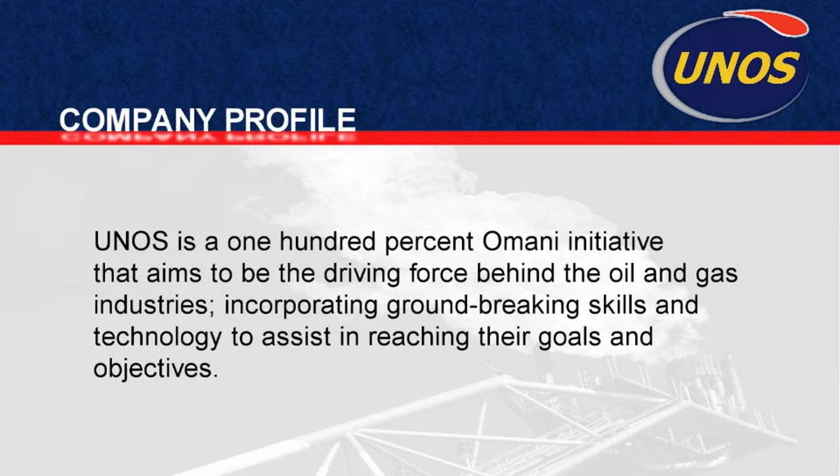UNOS is a 100% Omani initiative that aims to be the driving force behind the oil and gas industries, incorporating groundbreaking skills and technology to assist in reaching their goals and objectives. UNOS incorporates the expertise of foreign management support and experienced technical in-house knowledge to respond and provide the customer with enhanced solutions. Our core business activity is built around the emerging sector of Oman's oil and gas industry.

UNOS's intention is to add further services responding to niche market opportunities. Our vision at UNOS is to become the leading service provider to the oil and gas industry and the preferred employer in the Sultanate of Oman.

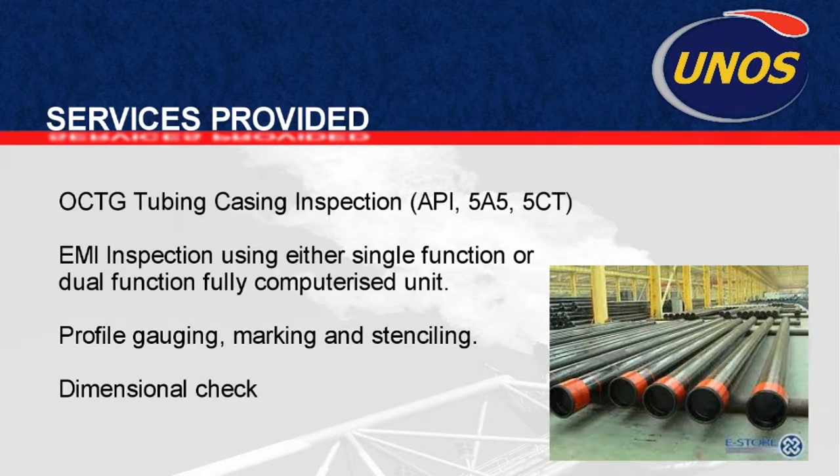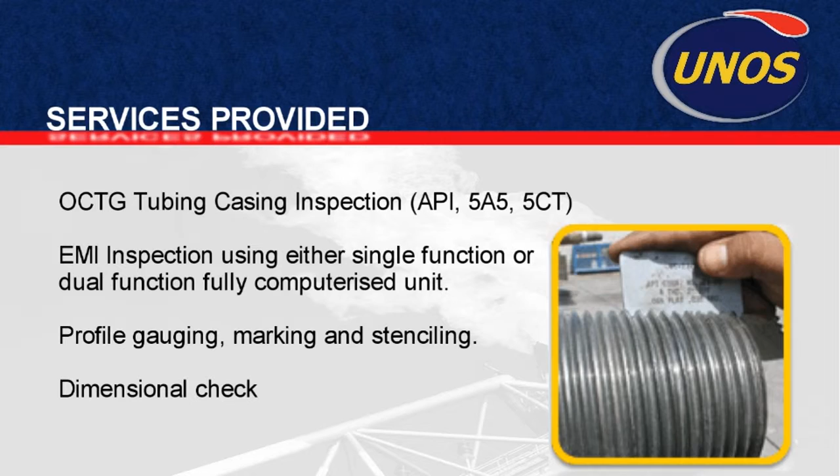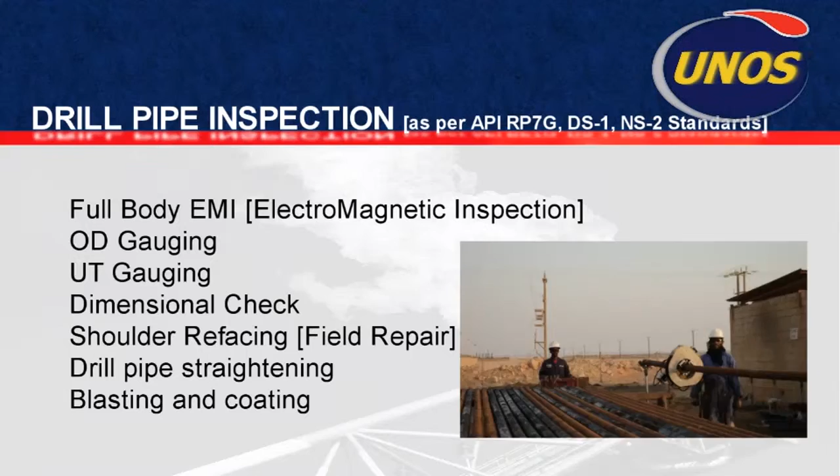OCTG tubing and casing inspection as per API 5A5 5CT. EMI inspection using either single function or dual function fully computerized unit. Profile gauging, marking and stenciling. Dimensional check. Drill pipe inspection. Full body EMI, OD gauging, UT gauging, dimensional check, shoulder refacing, field repair. Drill pipe straightening, blasting and coating.

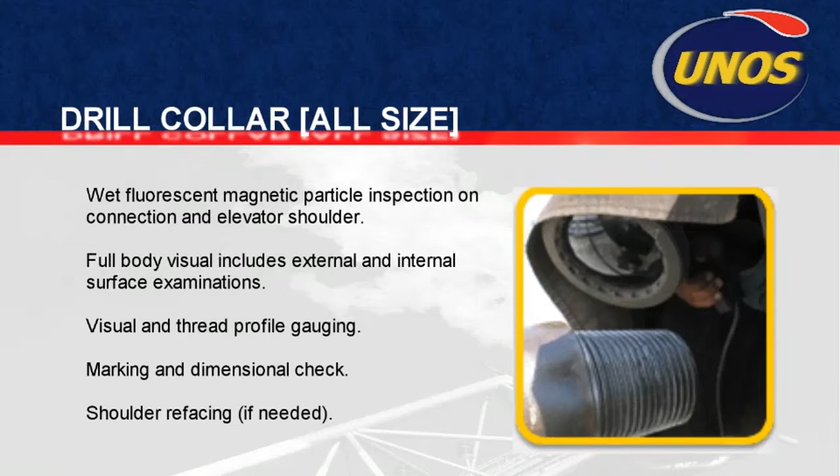Drill collar inspection all sizes. Wet fluorescent magnetic particle inspection on connection and elevator shoulder. Full body visual includes external and internal surface examinations. Visual and thread profile gauging. Marking and dimensional check. Shoulder refacing if needed.

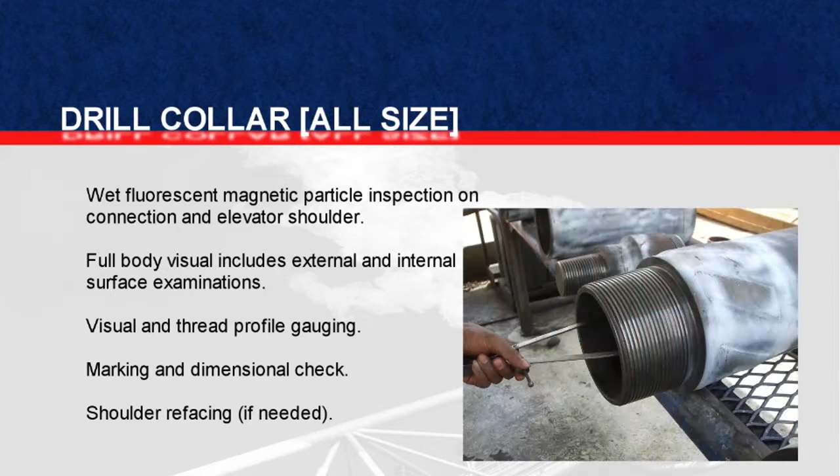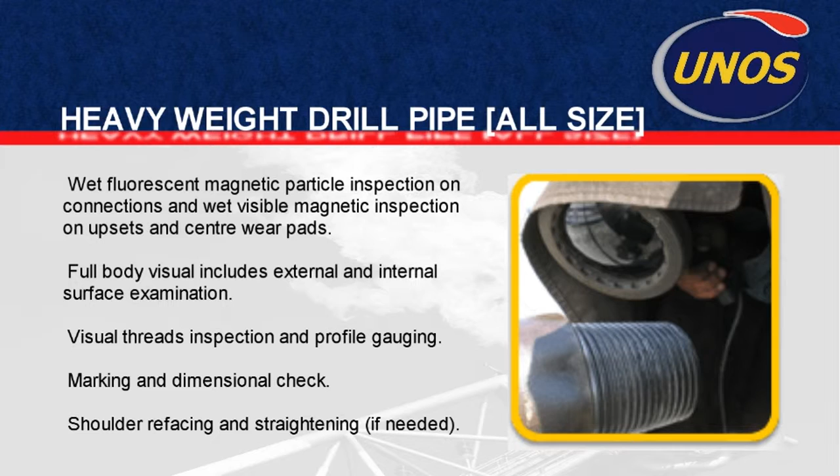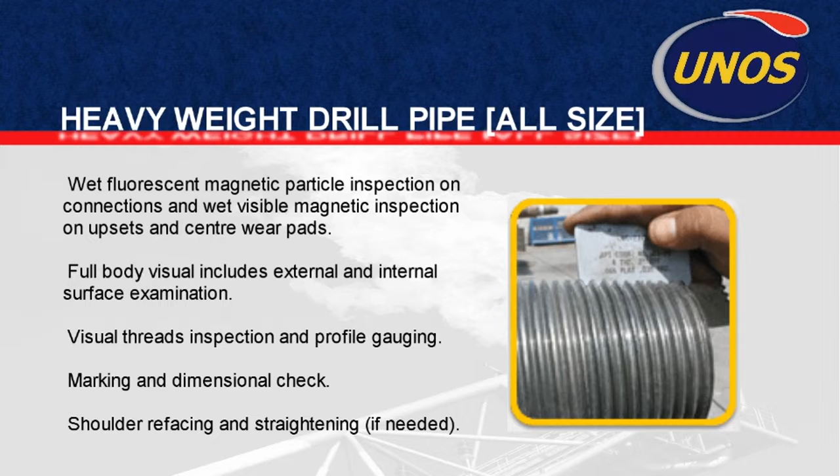Heavyweight drill pipe all sizes. Wet fluorescent magnetic particle inspection on connections and wet visible magnetic inspection on upsets and center wear pads. Full body visual includes external and internal surface examination. Visual threads inspection and profile gauging. Marking and dimensional check. Shoulder refacing and straightening if needed.

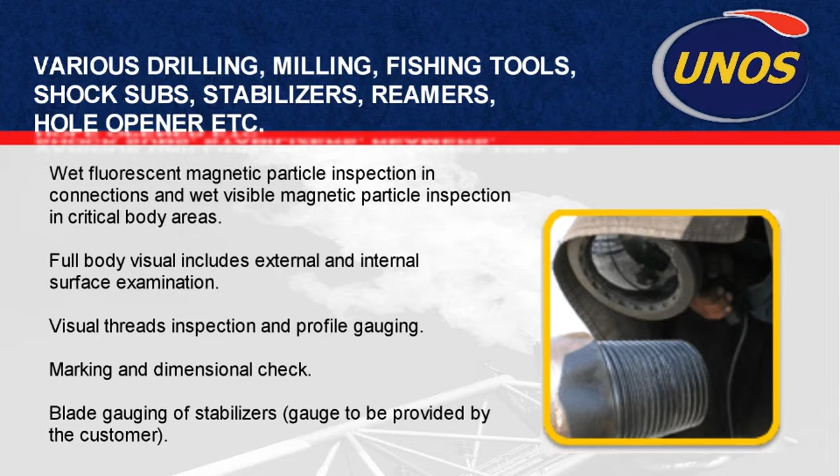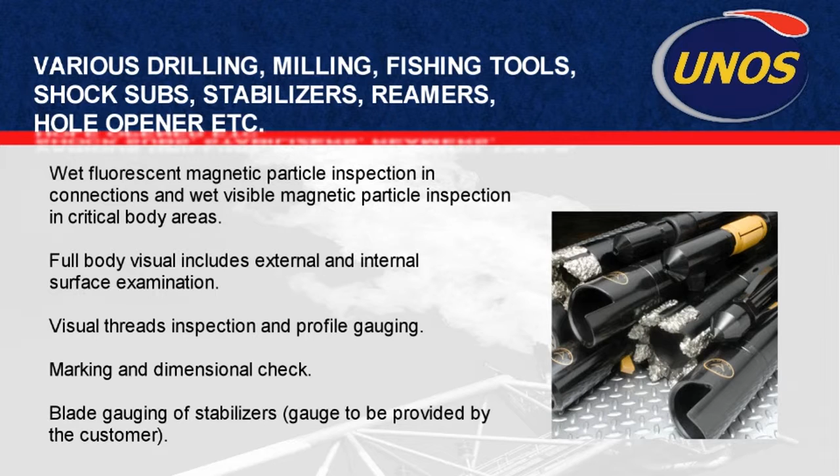Various drilling, milling, fishing tools, shock subs, stabilizers, reamers, hole openers, etc. Wet fluorescent magnetic particle inspection in connections and wet visible magnetic particle inspection in critical body areas. Full body visual includes external and internal surface examination. Visual threads inspection and profile gauging. Marking and dimensional check. Blade gauging of stabilizers.

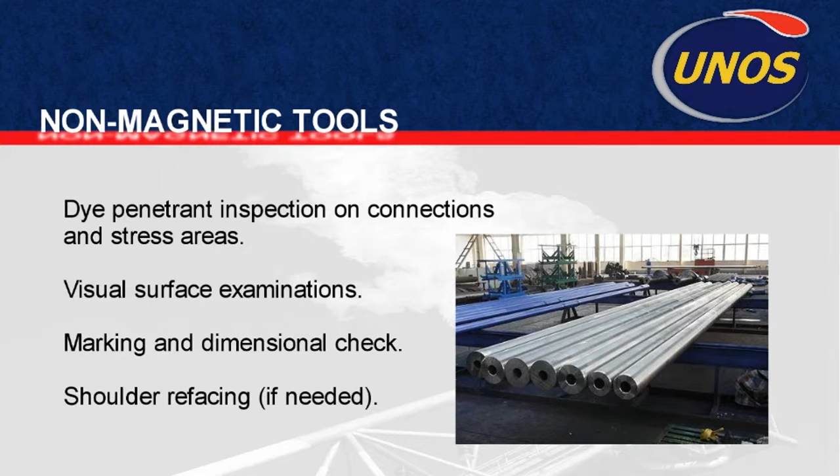Non-magnetic tools. Dye penetrant inspection on connections and stress areas. Visual surface examinations. Marking and dimensional check. Shoulder refacing if needed.

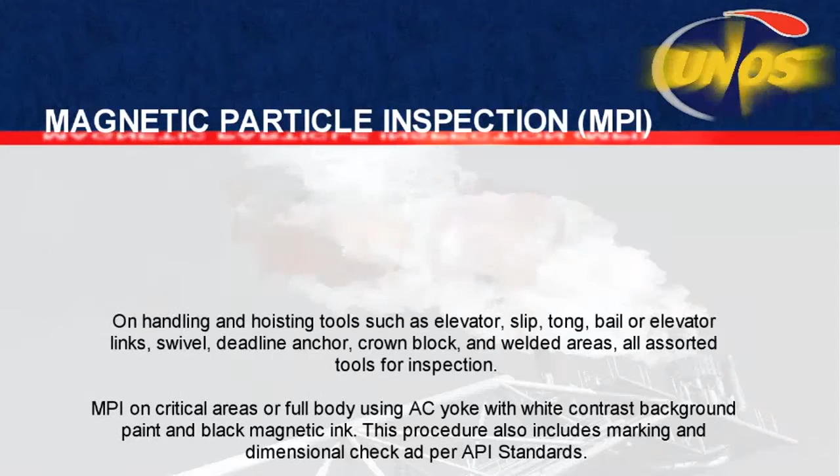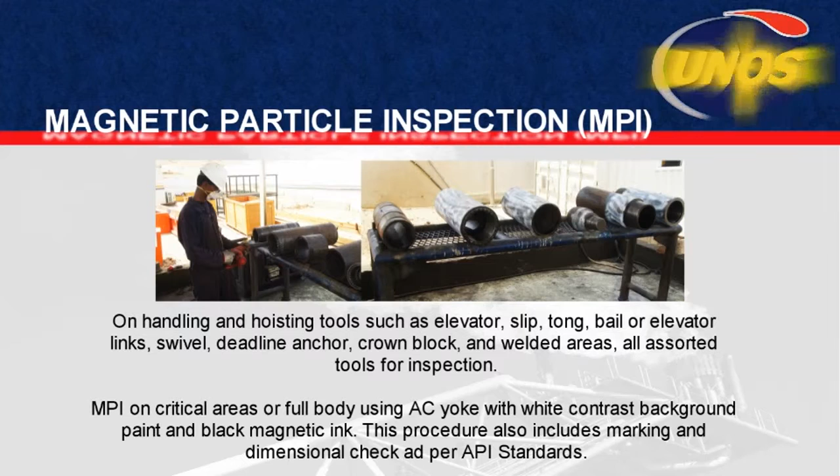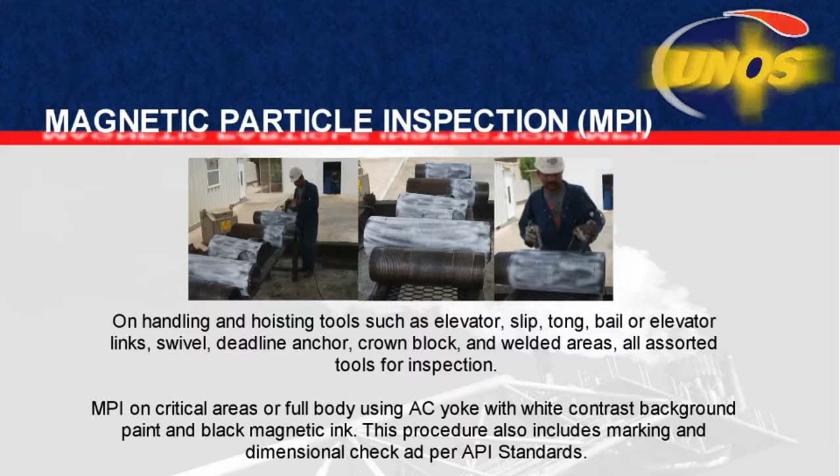Magnetic particle inspection on handling and hoisting tools such as elevator, slip, tong, bail or elevator links, swivel, deadline anchor, crown block, and welded areas, all assorted tools for inspection. MPI critical areas or full body using AC yoke with white contrast background paint and black magnetic ink. This procedure also includes marking and dimensional check as per API standards.

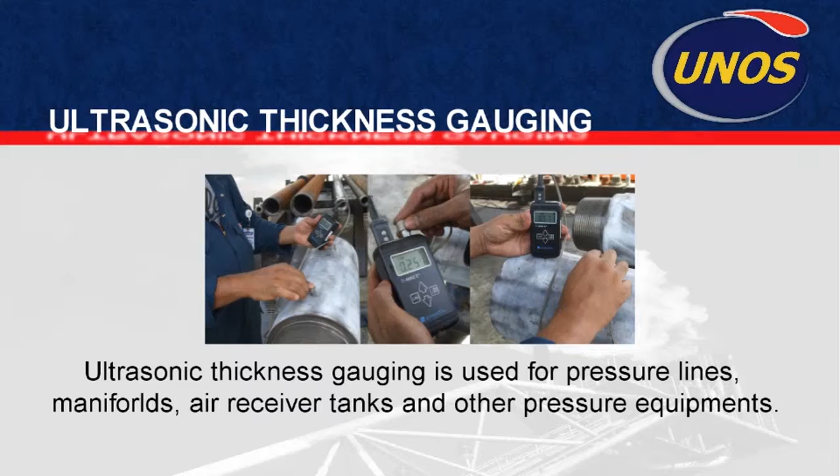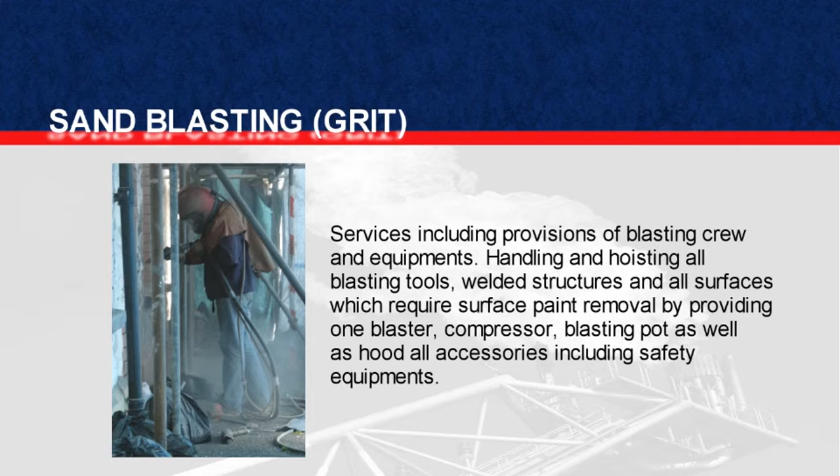Ultrasonic thickness gauging. Ultrasonic thickness gauging is used for pressure lines, manifolds, air receiver tanks, and other pressure equipment. Sandblasting grit. Services including provision of blasting crew and equipment, handling and hoisting all blasting tools, welded structures, and all surfaces which require surface paint removal by providing one blaster, compressor, blasting pot as well as hood, all accessories including safety equipment.

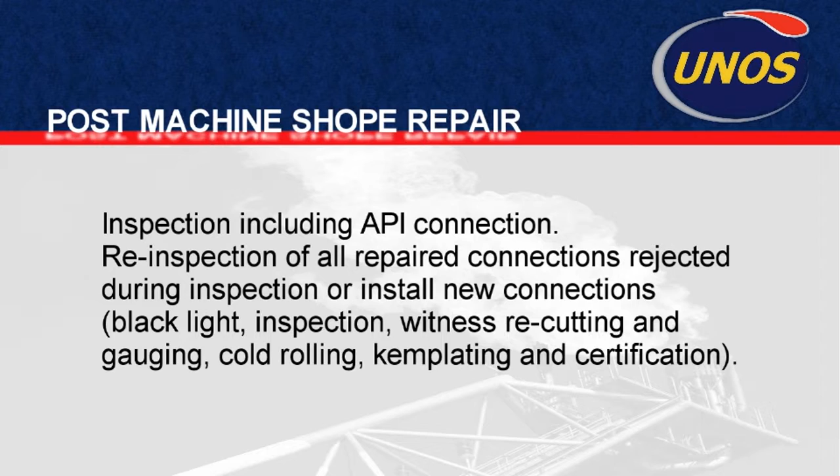Post-machine shop repair. Inspection including API connection, re-inspection of all repaired connections rejected during inspection, or install new connections, black light inspection, witness recutting and gauging, cold rolling, templating, and certification. Witness and certification. Witness and certification for all types of pressure testing.

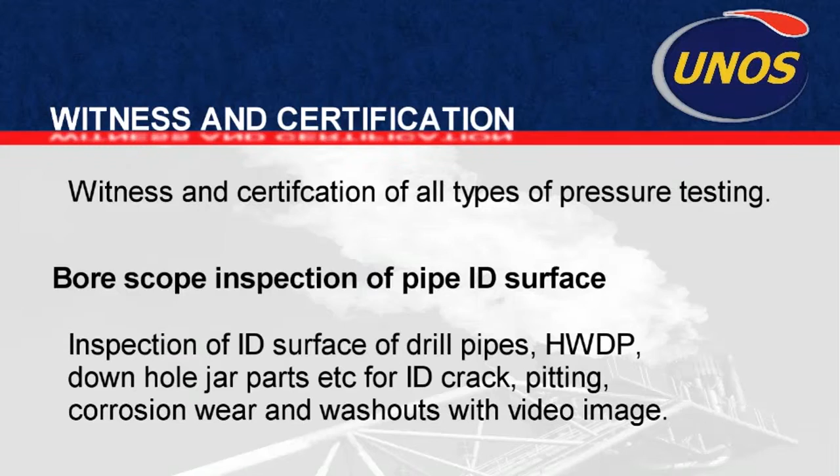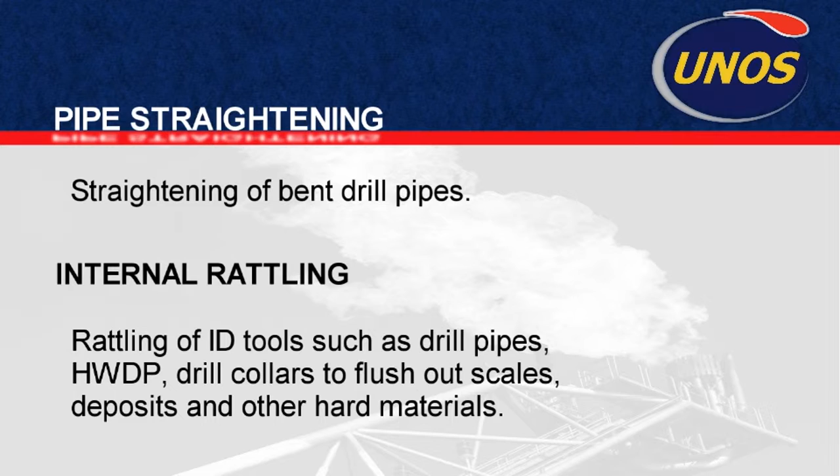Bore scope inspection of pipe ID surface. Inspection of ID surface of drill pipes, HWDP, downhole jar parts, etc. for ID crack, pitting, corrosion wear, and washouts with video image. Pipe straightening. Straightening of bent drill pipes. Internal rattling. Rattling of ID tools such as drill pipes, HWDP, drill collars to flush out scales, deposits, and other hard materials.

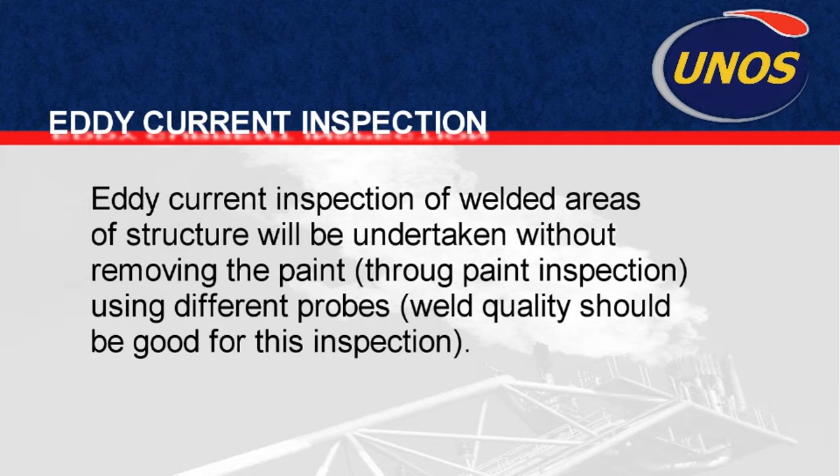Eddy current inspection. Eddy current inspection of welded areas of structure will be undertaken without removing the paint through paint inspection. Using different probes, weld quality should be good for this inspection.

Some of our clients are Petrogas, Weatherford, Baker Hughes INTEQ, Midwest Oilfield Services, Shaleem Petroleum, Shivani Oil and Gas Company, Great Wall Drilling Company, Seven Seas Drilling Company, Tom International, Towell Drilling and Oilfield Services LLC, Medco Energy and Oil and Gas, Dalma Energy Services and Company LLC, CC Energy Development, Oman Oil, PTTEP.

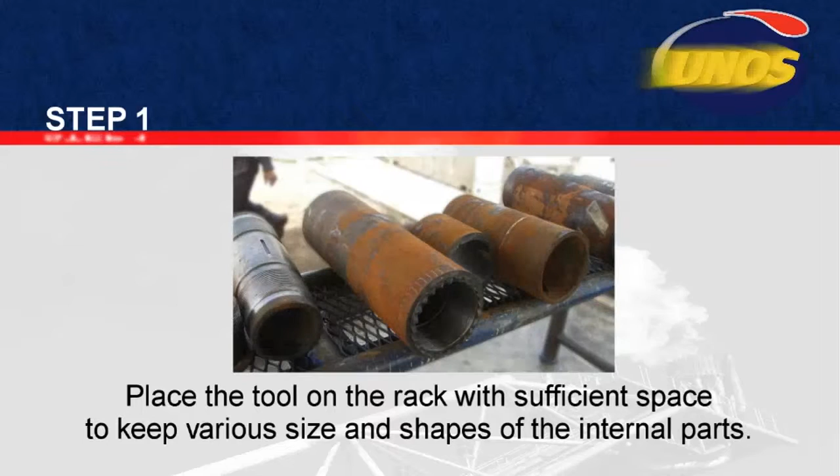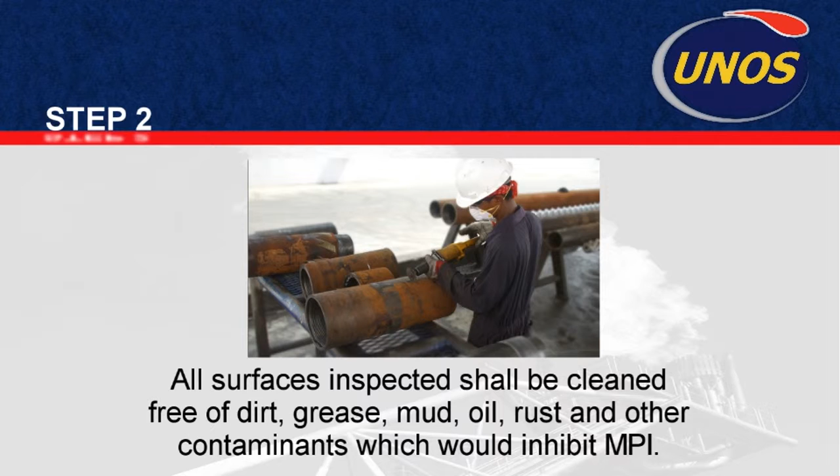Step 1. Place the tool on the rack with sufficient space to keep various sizes and shapes of the internal parts. Step 2. All surfaces inspected shall be cleaned free of dirt, grease, mud, oil, rust, and other contaminants which will inhibit MPI. Step 3. Stress areas like upset areas and part holes shall be buffed and cleaned properly to facilitate MPI.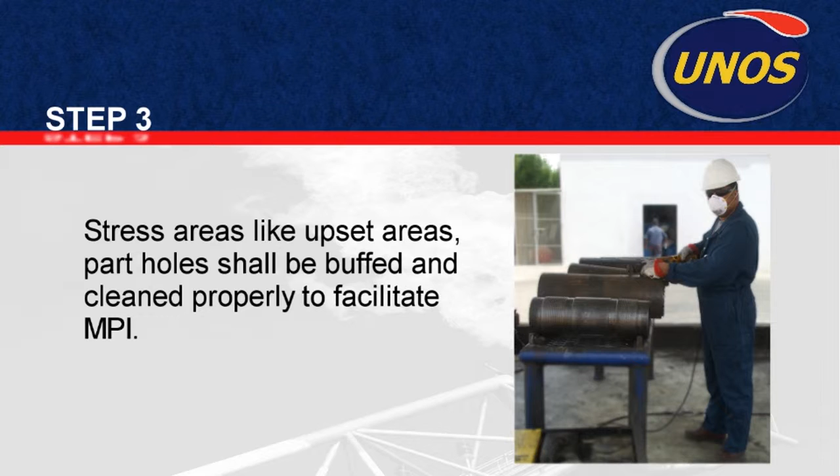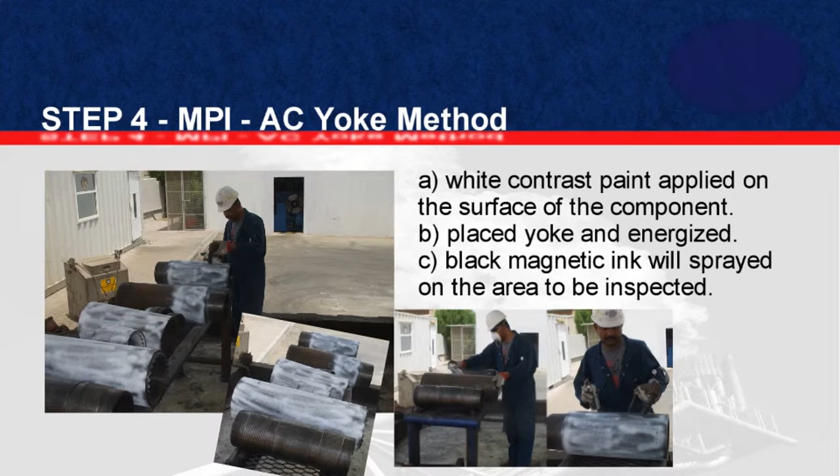Step 4. MPI AC yoke method. A. White contrast paint is applied on the surface of the component. B. Yoke is placed and energized. C. Black magnetic ink will be sprayed on the area to be inspected.

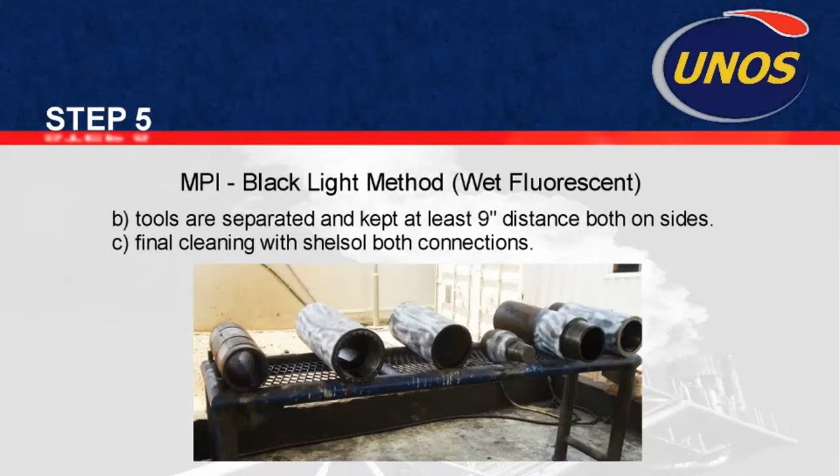Step 5. MPI blacklight method, the wet fluorescent. A. Clean pin and box connection with shelsol or kerosene. If threads are rusted or corroded, a soft grinding wheel and buffing brush are used to clean thoroughly. B. Tools are separated and kept at least 9 inches distance on both sides. C. Final cleaning of both connections with shelsol.

D. Preparation of inspection equipment: AC yoke, UT gauge, DC coil, black UV light, centrifuge tube, gauss meter field indicator, solvent medium and fluorescent magnetic powder, measuring instruments, straight edge, OD ID caliper, inspection mirror, and blacklight intensity meter.

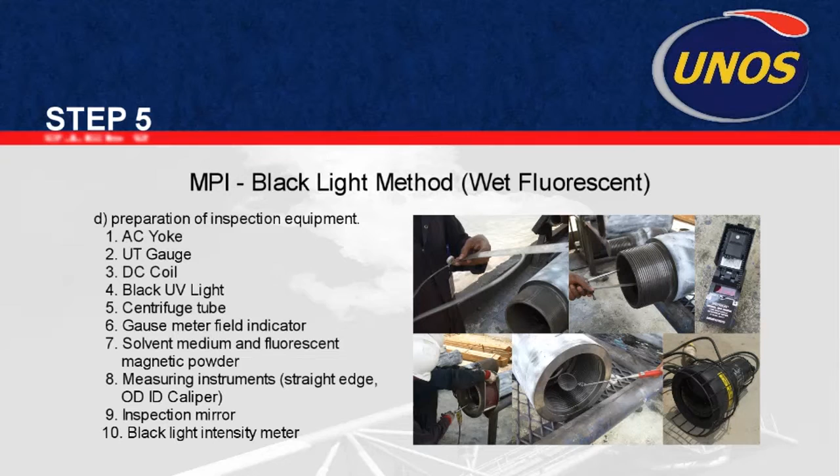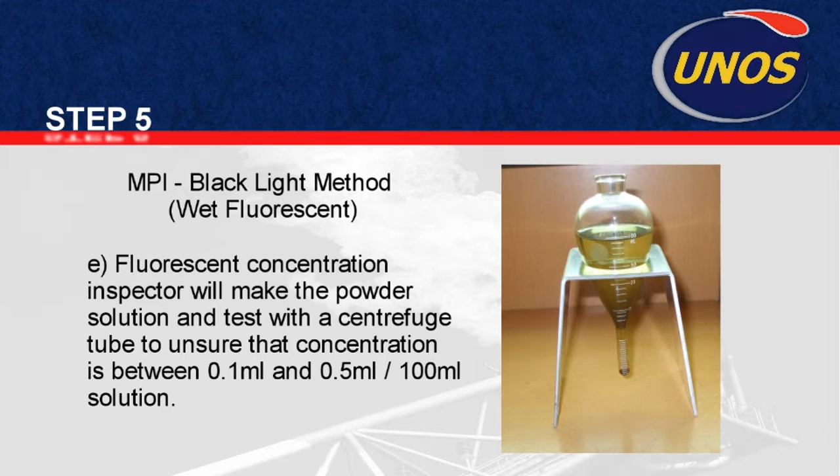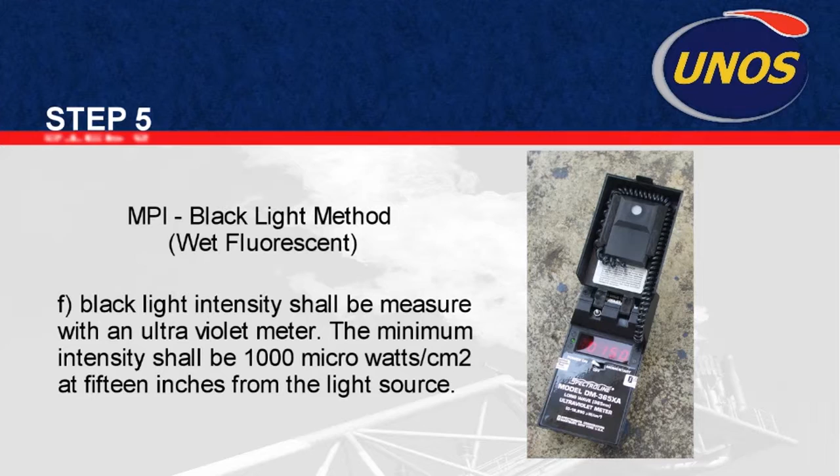E. Fluorescent concentration: the inspector will make the powder solution and test with a centrifuge tube to ensure the concentration is between 0.1 milliliter and 0.5 milliliter per 100 milliliter solution. F. Black light intensity shall be measured with an ultraviolet meter. The minimum intensity shall be 1000 microwatts per centimeter squared at 15 inches from the light source.

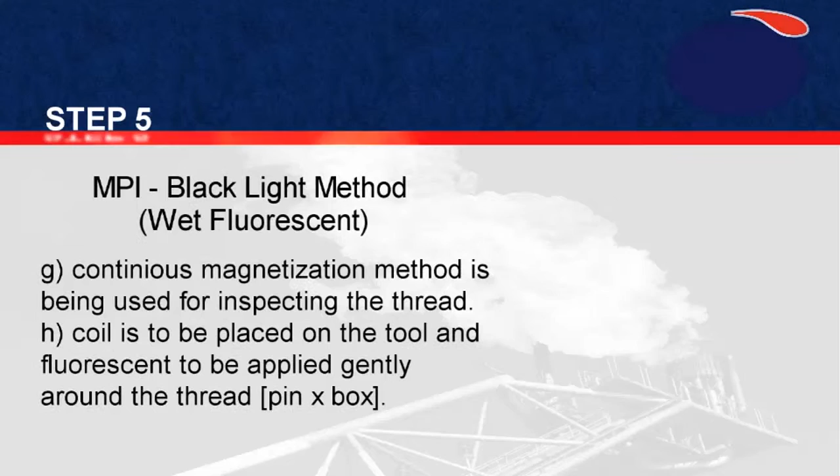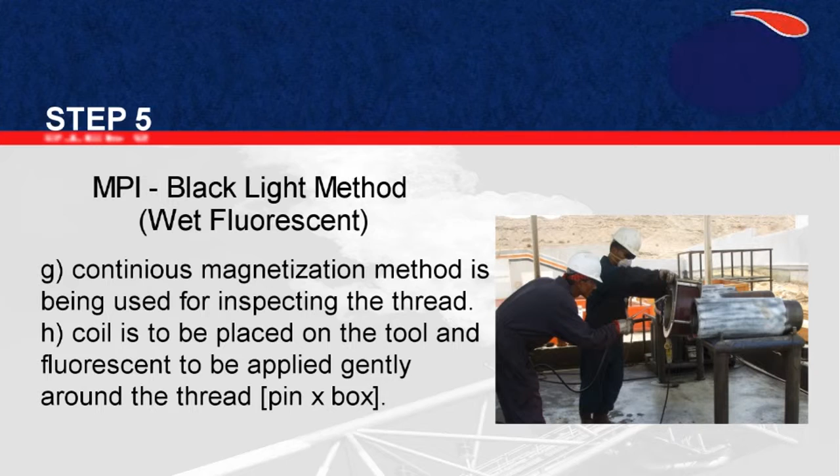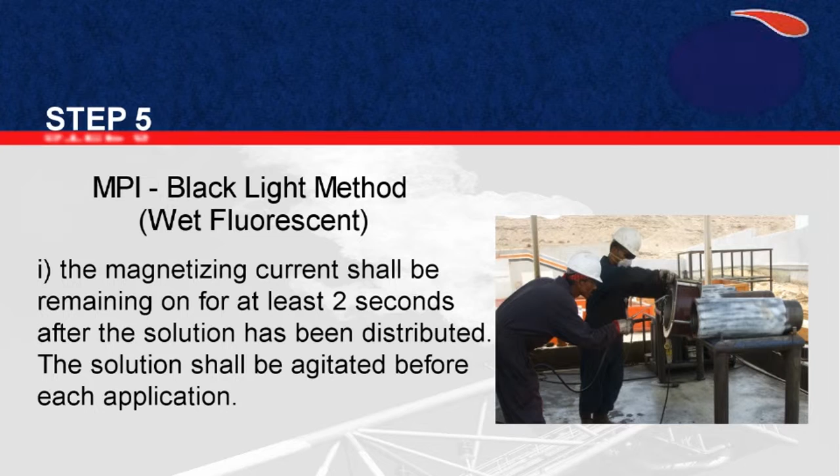G. Continuous magnetization method is being used for inspecting the thread. H. Coil is to be placed on the tool and fluorescent applied gently around the thread, pin and box. I. The magnetizing current shall remain for at least 2 seconds after the solution has been distributed. The solution shall be agitated before each application.

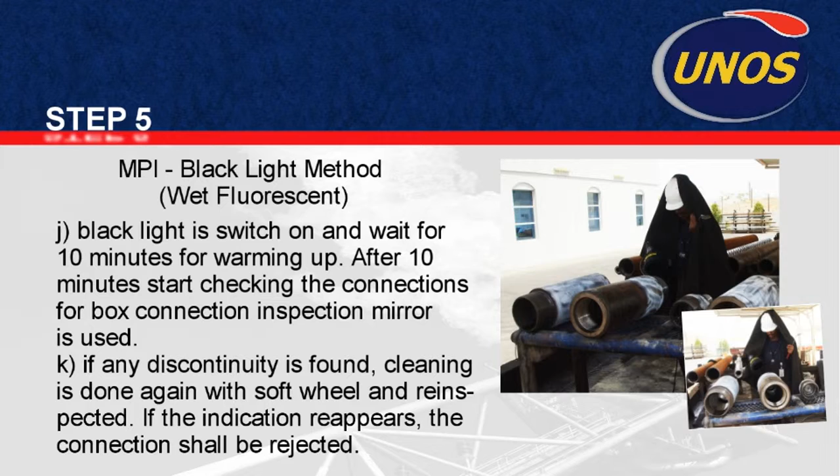J. Black light is switched on; wait 10 minutes for warming up. After 10 minutes, start checking the connections; for box connection inspection, a mirror is used. K. If any discontinuity is found, cleaning is done again with a soft wheel and re-inspected. If the indication reappears, the connection shall be rejected.

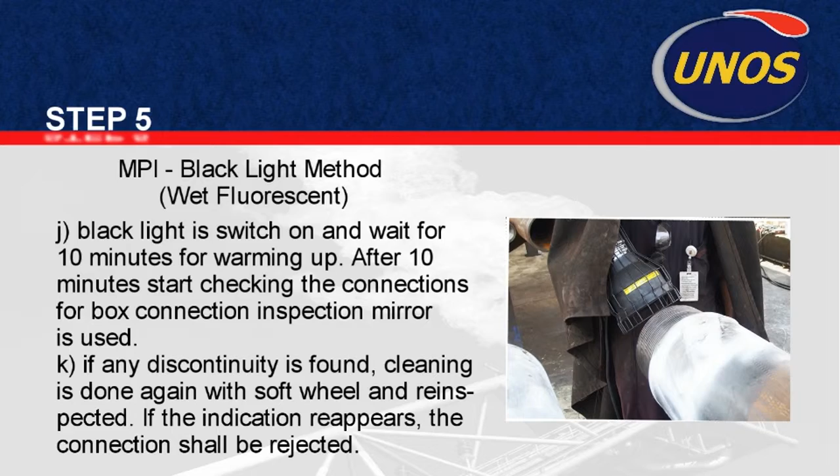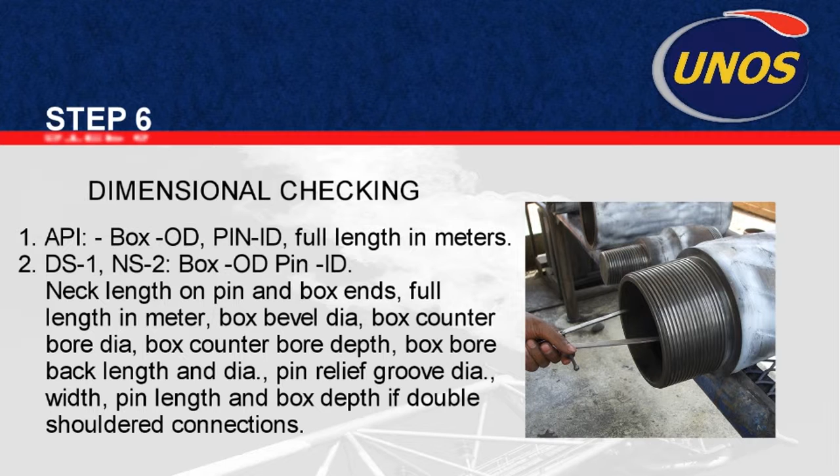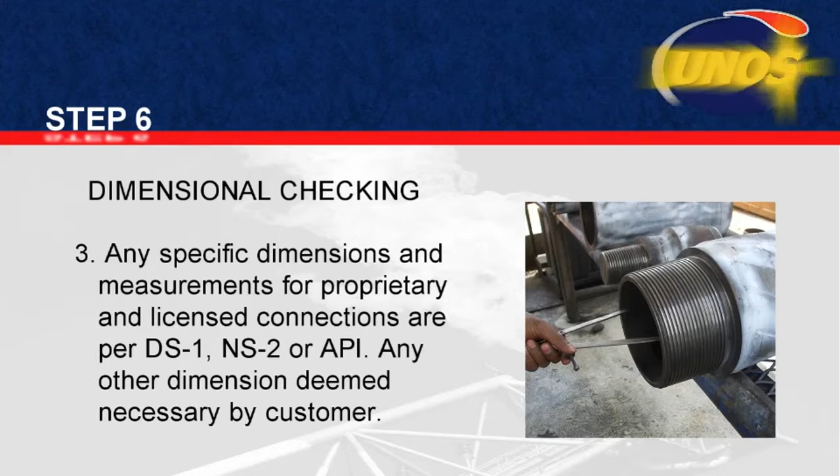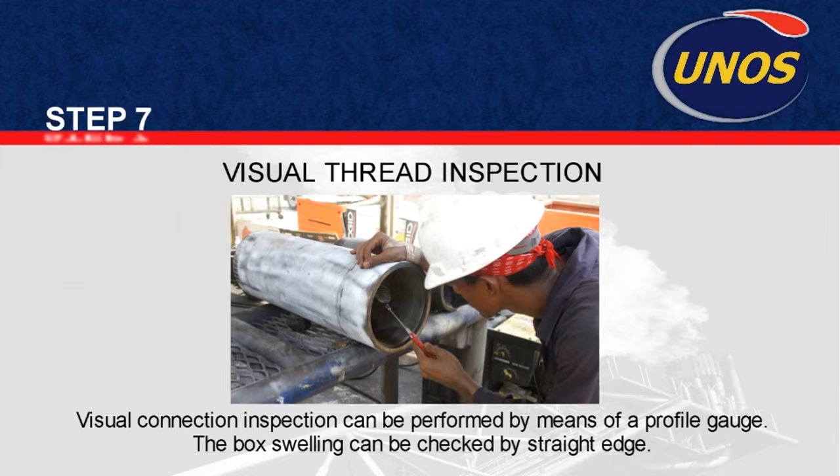3. Any specific dimensions and measurements for proprietary and licensed connections as per DS1, NS2, and/or API. Any other dimension deemed necessary by the customer. Step 7. Visual thread inspection. Visual connection inspection can be performed by means of a profile gauge. The box swelling can be checked by straight edge.

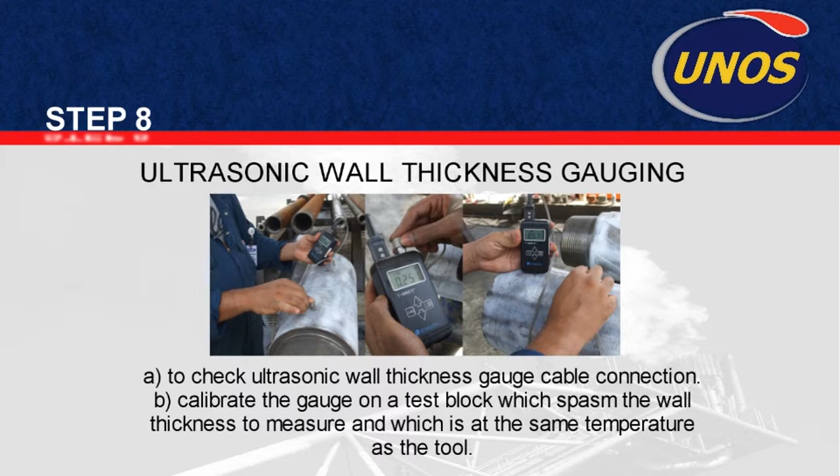Step 8. Ultrasonic wall thickness gauging. A. Check the ultrasonic wall thickness gauge cable connection. B. Calibrate the gauge on a test block which spans the wall thickness to measure and which is at the same temperature as the tool. C. Apply sufficient couplant to the tool surface, place the transducer on the tool center line perpendicular to the tool axis, and take the measurement.

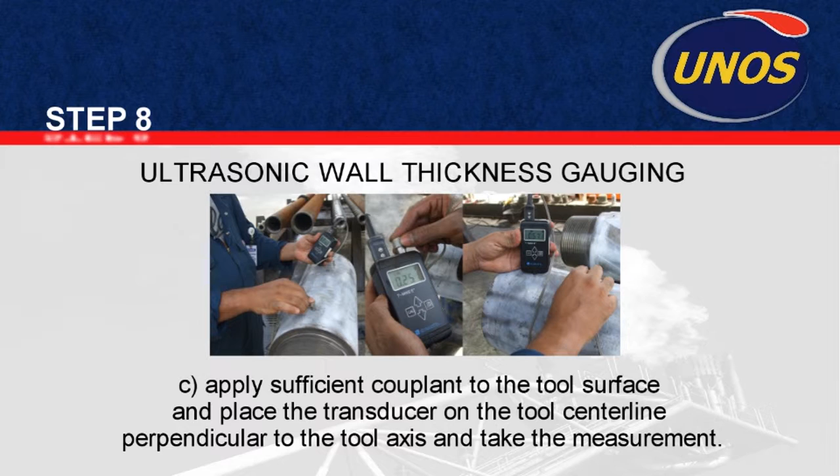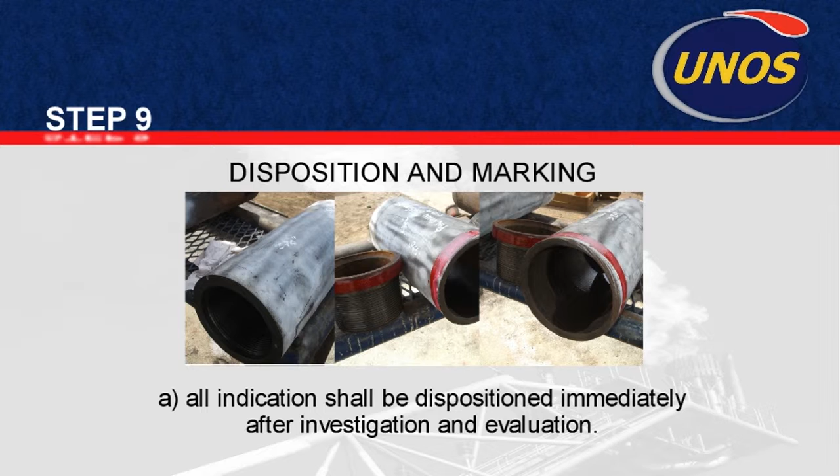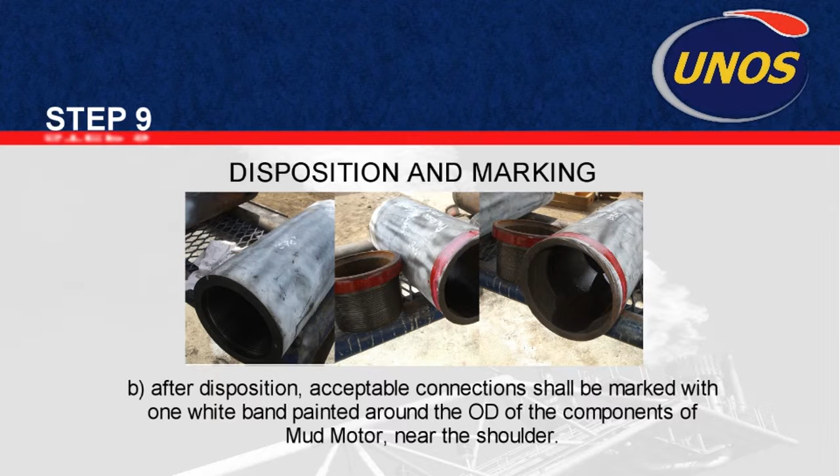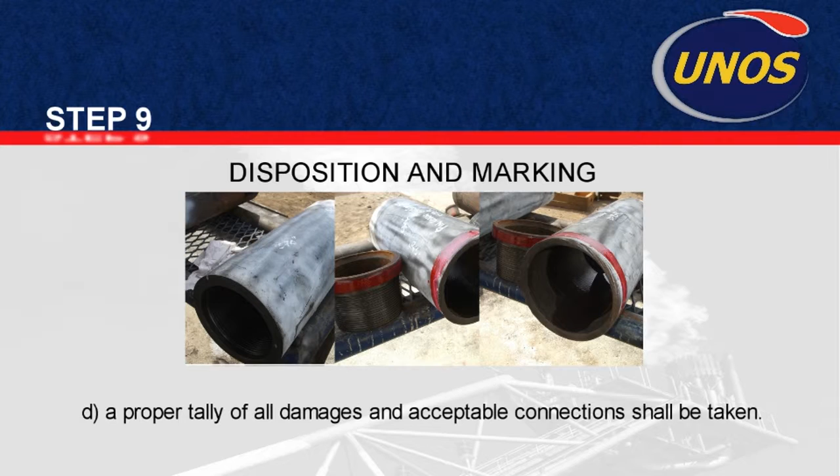Step 9. Disposition and marking. A. All indications shall be dispositioned immediately after investigation and evaluation. B. After disposition, acceptable connections shall be marked with one white band painted around the OD of the components of the mud motor near the shoulder. C. Thread, shoulder, dimensional, and other damage shall be painted red near the shoulder on the tool OD. D. A proper tally of all damages and acceptable connections shall be taken.